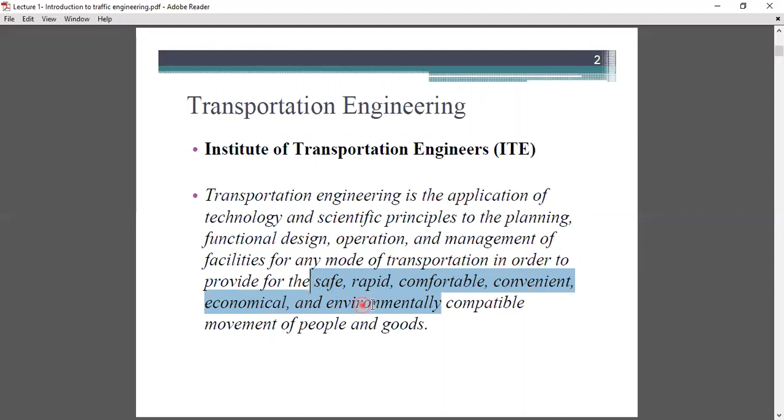This is in order to provide for safe, rapid, comfortable, convenient, economical, and environmentally compatible movement for people and goods. So transportation is nothing but the application of technology and scientific principle to the planning, functional design, operation, and management of the facility for any mode of transportation. We are not talking about just road transportation, land transportation, water transportation, or air transportation, but any mode of transportation. These applications of scientific principles are carried forward to provide safe, rapid, comfortable, convenient, economical, and environmentally compatible movement of people and goods.

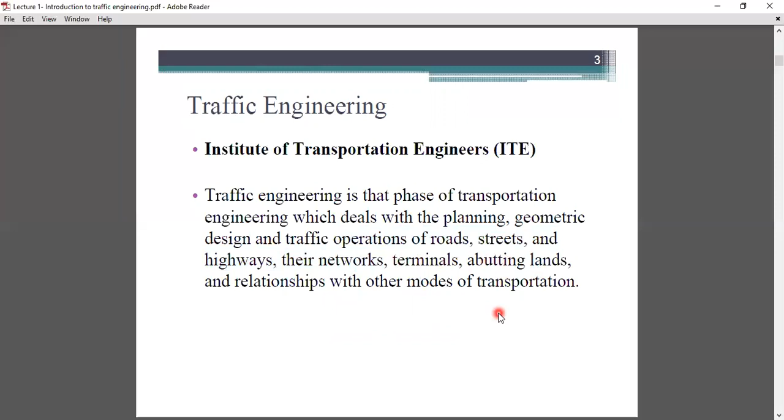So we are studying traffic engineering. What is traffic engineering? Traffic engineering is the phase of transportation engineering which deals with the planning, geometric design, and traffic operation of roads, streets, and highways, the network, terminals, abutting lands, and relationship with other modes of transportation. It is a kind of subdivision within transportation engineering which deals with the planning, geometric design, and traffic operation of roads, arterial roads, highways, national highways, state highways, major roads, district roads, any mode of roads, street and highway networks, terminals, abutting lands, and the relationship with other modes of transportation.

There are different types of transportation modes available: road network, rail, air, maritime, or pipeline. Pipeline is nothing but commuting or moving a fuel or liquid from one place to another place. It's a kind of transportation, but there are four main types of transportation: road, rail, air, and maritime, or in simple terms, waterways or water transportation.

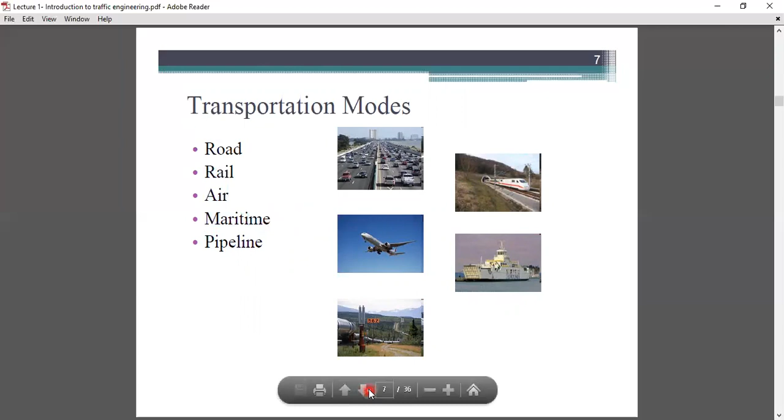Next is transportation modes. There are different types of transportation modes which we studied in the urban transport system, like automobile, taxi or for-hire vehicles, local bus transit, express bus transit, paratransit, light rail, heavy rail, ferry, intercity people transportation system, urban and intercity freight transport system. These are the different types of transportation studied in the previous subject of urban transportation system, and what modes are available for transportation. Let's take a fresh look: urban people transportation, intercity people transportation system, automobile, intercity bus, railroad, airways, waterways, and urban and intercity freight transportation.

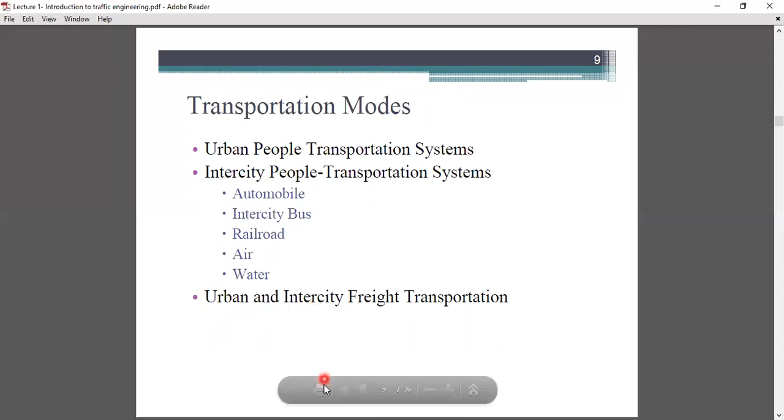So why are traffic engineers needed, or why is there a subdivision in transportation engineering named traffic engineering? There are three types of professional relationships: relationship with the general public, relationship with elected officials, and professional ethics. There are different types of relationships with general people, elected officials like government authorities, local urban bodies, and professional ethics. Ethics depends on the person, or may differ.

Safety. This is the primary objective of any traffic engineer. The principal goal of the traffic engineer remains the provision of a safe system for highway traffic, because there are statistics showing 26,000 fatalities in Iran, 40,000 to 43,000 fatalities in the US, something like a civil war, where fatal accidents occur on the road every day. So the primary objective of the traffic engineer is nothing but safety. The objective of safe travel is always number one and is never finished for the traffic engineer. It is not a kind of task that just provides safe travel for a small amount of period, but it is a never-finished work for the traffic engineer.

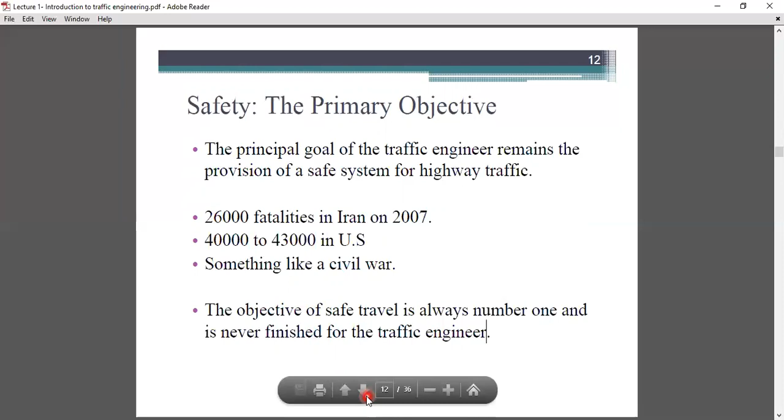Other objectives of the traffic engineer are to provide speed, comfort, convenience, economy, and environmental compatibility for the construction of roads as well as sustainable roads.

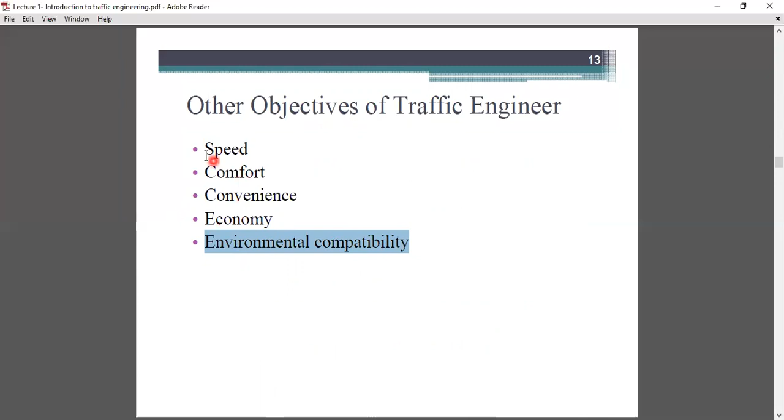There are different objectives like speed, comfort, convenience, economy, and environmental compatibility. While speed of travel is much to be desired, it is limited by transportation technology, human characteristics, and the need to provide safety. So there are different types of characteristics available, like human characteristics as well as vehicular characteristics. In human characteristics, we probably know the PIEV theory: perception, intellection, emotion, and volition time. These human and vehicular characteristics are to be included in traffic engineering.

Comfort and convenience are generic terms and mean different things to different people. Comfort involves the physical characteristics of the vehicle and roadways, and is influenced by our perception of safety. So comfort, convenience, and the desire for speed differ for different people. Some people want higher speed rather than comfort, but others choose comfort as a primary concern.

Convenience relates more to the ease with which trips are made and the ability of the transport system to accommodate all of our travel needs at the appropriate time.

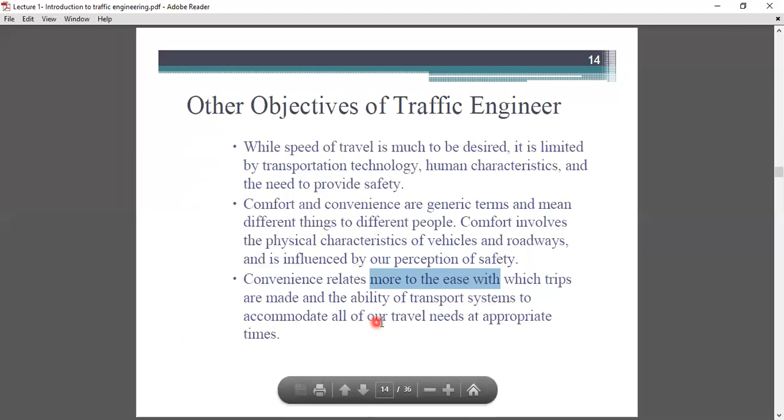Economy is also relative. There is little in modern transport systems that can be termed cheap. All road networks or transportation infrastructure involve huge capital investment. Due to modern practices, technology, and equipment, there is high capital investment going through. Highways and other transportation systems involve massive construction, maintenance, and operating expenditure, most of which is provided through general and user taxes and fees.

Nevertheless, every engineer, regardless of discipline, is called upon to provide the best possible system for the money. So the other concern is to provide economic feasibility.

So if you are hired as a traffic engineer at the NHAI, National Highway Authority of India, your primary concern is to provide a safe, convenient, comfortable, economically sound, and environmentally friendly plan or road network for the general people and for the country. It is the duty of every engineer to suggest this best possible system for the money. Harmony with the environment is a complex issue that has become more important over time.

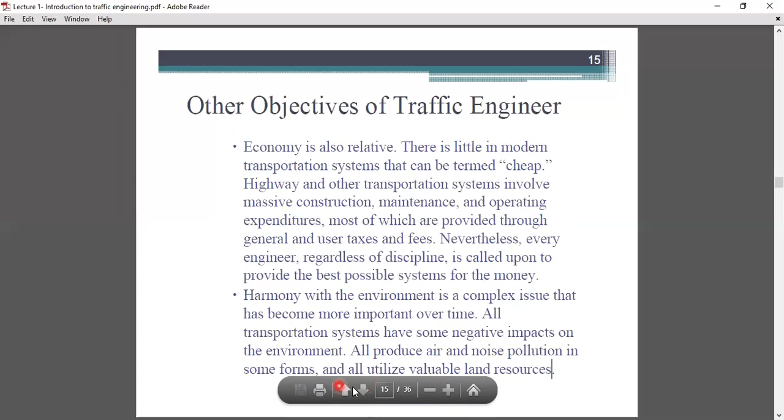Elements of the transport system include different types: facilities, vehicles, control system, users, and environment. Facilities means what kind of facilities are available. As an example, if we are talking about the BRTS bus system, bus stands are called facilities that users are going to use.

The next one is vehicle. If you're talking about BRTS buses, as we know right now all the BRTS buses are converted into AC buses, so there is higher comfort and convenience than in the past. So this type of characteristic falls into that particular category.

Thereafter, the control system. The proper scheduling, maintaining, and managing of a particular road network or BRTS network is hectic work, so it should be considered one of the major elements in the transportation system.

Thereafter, users - who use that particular system with ease, comfort, and convenience. And last but not least, the environment. As we all know, every system or everything humans build is going to affect the environment in both positive and negative manners. So harmony with the environment means providing solutions that minimize the impact on the environment. So it is a major element.

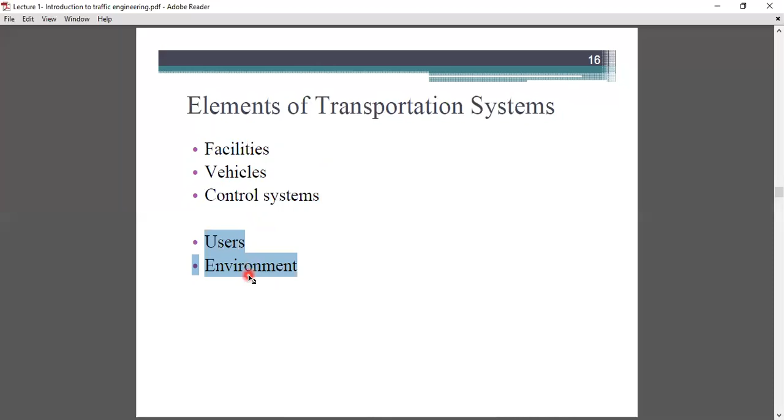Okay, so these are the different elements of traffic engineering. In the past we talked about elements of transportation engineering, but right now these are elements of traffic engineering. First is traffic studies and characteristics - how the current situation occurs, or how it will affect the near future, predicting how traffic will be available in the next 5 or 10 years, or what congestions occur at that particular time.

Next one is performance evaluation. Performance evaluation is nothing but providing how the particular system will work for users, or what kind of difficulties or problems are going to occur.

Next one is facility design. Facility design is nothing but developing a road that reduces the number of fatal accidents, as well as reduces queues at signals, or reduces traffic congestion at that road. So facility design has a more significant impact in traffic engineering.

Next one is traffic control. There are different types of traffic control parameters or methodology used, like sign boards, markings, signals, bumpers. So these kinds of traffic control devices or methodology are used in that particular domain to optimize or utilize the best out of it.

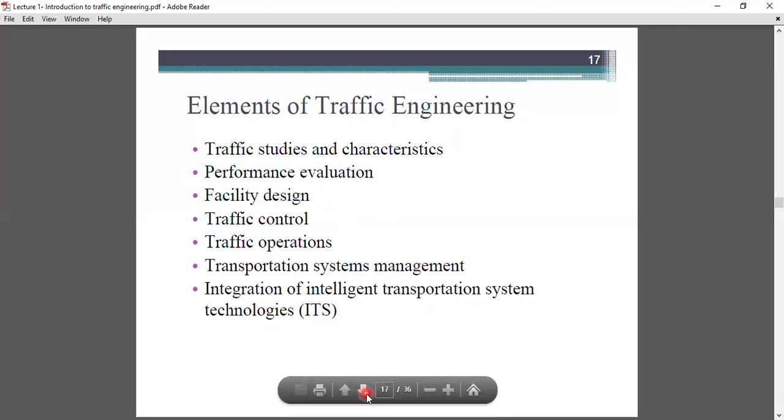Okay, so the first one, traffic studies and characteristics, involves measuring and quantifying various aspects of highway traffic. Studies focus on data collection and analysis used to characterize traffic, including traffic volumes and demand, speed and travel time, delay, accidents, origin and destination, mode use, and other variables.

So this kind of survey we do in traffic studies covers traffic volumes and traffic demand - how travel demand is going to affect that particular region. What are the trip generation ratio, trip distribution ratio, trip attraction ratio, and the modal split - which modes people are using for their day-to-day commute.

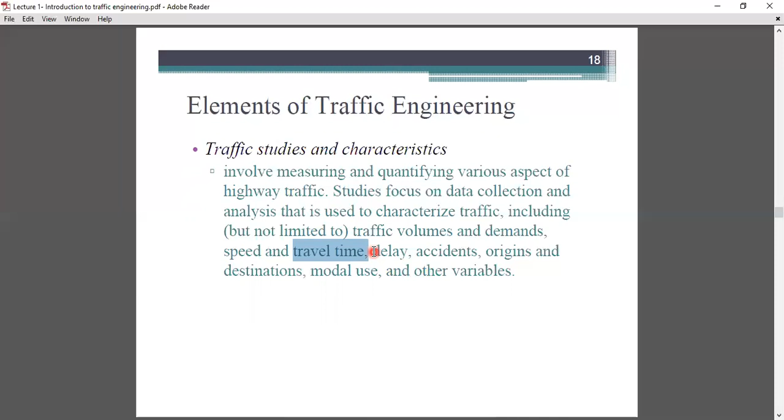So speed and travel time, delay, accidents, the number of fatal accidents, and various other data collection are needed, and analyzing that particular data helps identify how traffic is characterized in the current situation as well as in the next 5 or 10 years.

Next is performance evaluation, which means the way traffic engineers rate the operating characteristics of individual sections of facilities, and the facility as a whole, in relative terms. Such evaluation relies on measures of performance quality, and is often stated in terms of level of service. Level of service is a different portion.

The Ministry of Urban Development publishes the LOS booklet every 2 years, and LOS classifies the level of service - it's a rating system for that particular service used by the general people.

So performance evaluation is a kind of system where people rate that particular system, how it affects their day-to-day life, what comfort and convenience it provides, and how safe the system is.

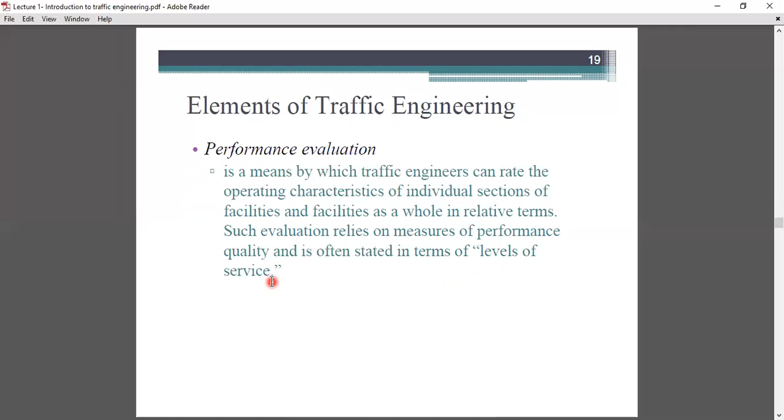Next is facility design. Facility design involves the traffic engineers in the functional and geometric design of the highway and other traffic facilities. Traffic engineers per se are not involved in the structural design of the highway facilities, but should have some appreciation for the structural characteristics of the facility.

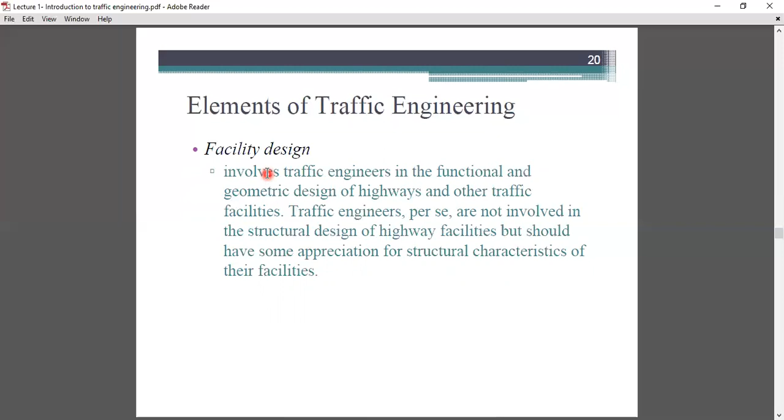So in traffic engineering, we are not necessarily concerned with the structural characteristics of the highway, like whether it is a rigid pavement or flexible pavement, or the thickness of the base layer and sub-base layer. But it involves just an appreciation, or suggesting a suitable solution to the structural designer who designs a pavement for that highway, national highway or state highway. So in facility design, traffic engineers only focus on how it will affect the day-to-day users.

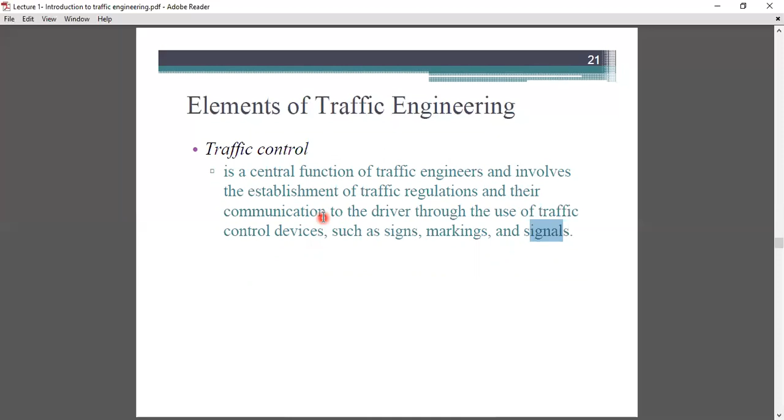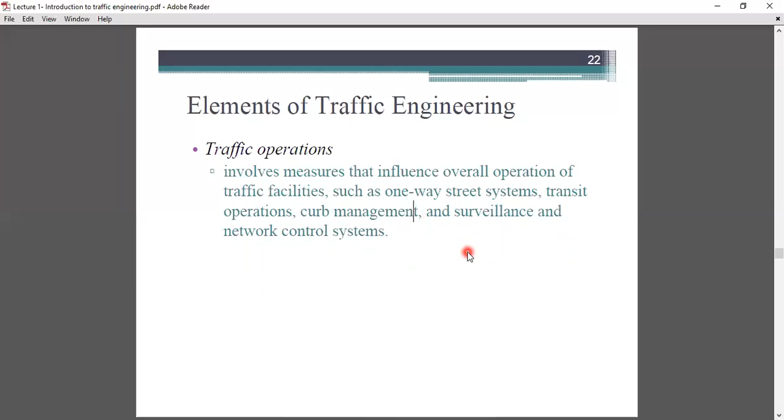Next is traffic operation. It involves measures that influence overall operation of traffic facilities, such as one-way street systems, transit operation, curb management, and surveillance and network control systems. In traffic operation, different types of operation methodologies are used, particularly for preventing excessive vehicles going through a particular street, such as one-way street systems, transit operation, curb management, and surveillance and network control systems.

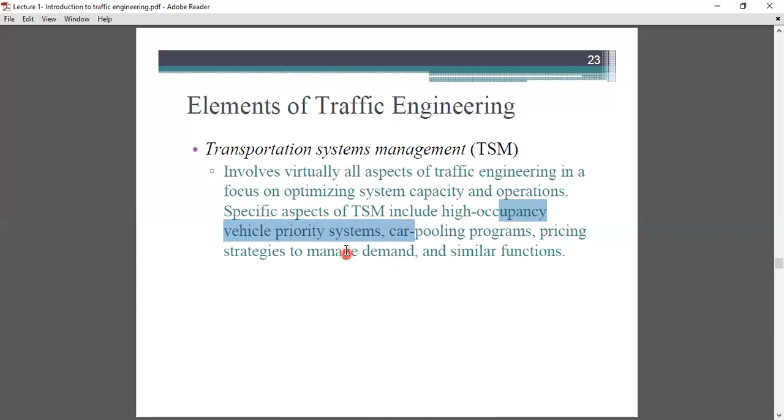The next one is transportation system management, which involves virtually all aspects of traffic engineering, focusing on optimizing system capacity and operation. Specific aspects of TSM include high occupancy vehicle priority systems, carpooling programs, pricing strategies to manage demand, and similar functions, working on managing travel demand as well as traffic demand.

The next one is intelligent transport system, which refers to the application of modern telecommunication technology to the operation and control of the transportation system. Such systems include automated highways, automated toll collection systems, vehicle tracking systems, in-vehicle GPS and mapping systems, automated enforcement of traffic lights and speed laws, smart control devices, and others.

But intelligent transport systems are a kind of very costly infrastructure, so they are not used frequently. But due to technological advancement in the field of transportation and traffic engineering, there are still upgradations and improvements going on in that area. In the very near future, in the next 5 or 10 years, we will see these kinds of systems being used very frequently for day-to-day commute.

So there are different elements of traffic engineering. First is transportation demand. We already had a discussion on this in the urban transportation system, about what transportation demand is and the difference between mobility and accessibility. So let's just take a quick look at that again.

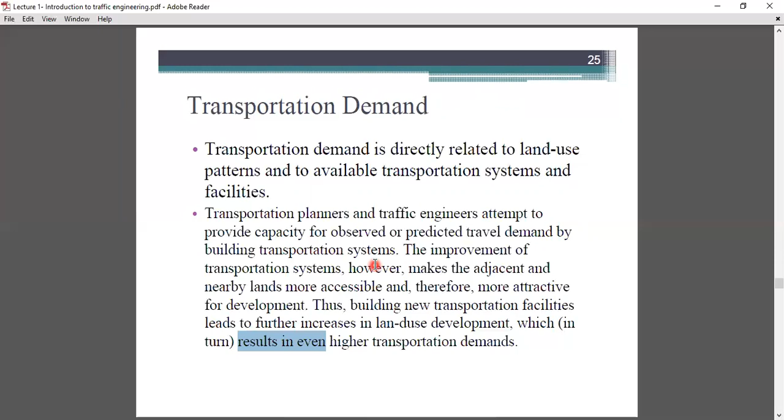So to obtain that travel demand, the first step is to create an O and D survey, origin and destination survey. So this is transportation demand. It's connected with the transportation facility, it's connected with land use, and it's also connected to the transportation demand.

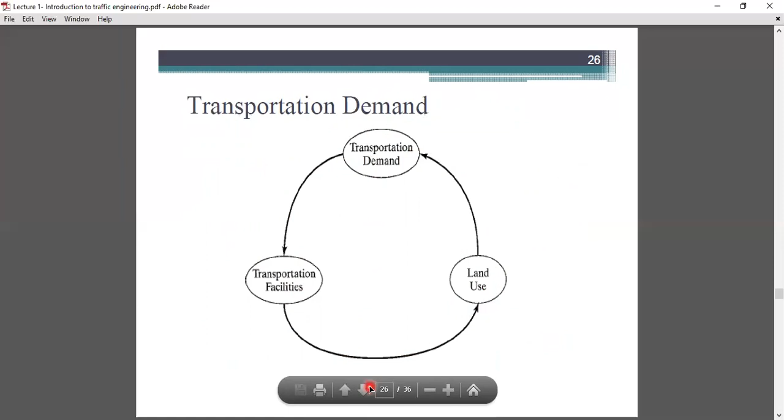So the next one is mobility and accessibility. So what is mobility and what is accessibility? In simple terminology, accessibility is nothing but access to the activity.

And what is mobility? Mobility is nothing but access to movement. So accessibility is access to the activities. Like if we are talking about any bus transportation system, how frequently can you reach that bus stop - that's called accessibility. If a bus stop is near your home, say a 5 minute distance, there is high accessibility available in your area. So accessibility is access to the activities, and mobility is access to that movement.

So when you reach that particular bus stop, how fast you get a new bus for ridership - that's called mobility. So it is very much connected with each other, mobility as well as accessibility.

Mobility gives travelers a wider range of choice of where to go to satisfy particular needs. Mobility allows a shopper to choose from among many competing shopping centers and stores. Accessibility is a major factor in the value of land. When land can be accessed by many travelers from many potential origins, it is more desirable for development and therefore more valuable. Thus, proximity of land to major highways and public transportation facilities is a major factor determining its value. So accessibility is access to the activities, and mobility is access to the movement.

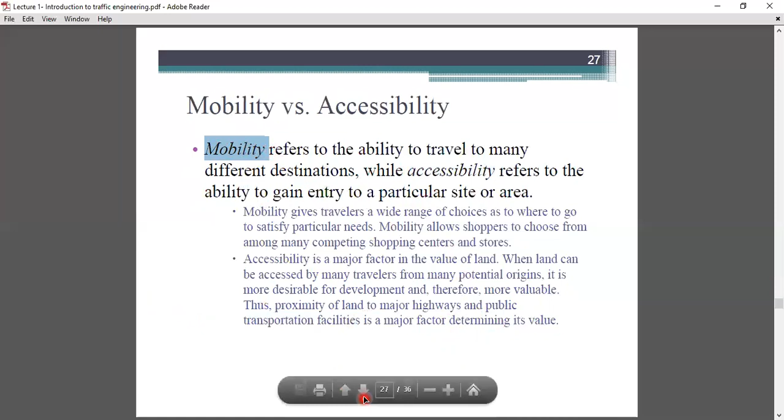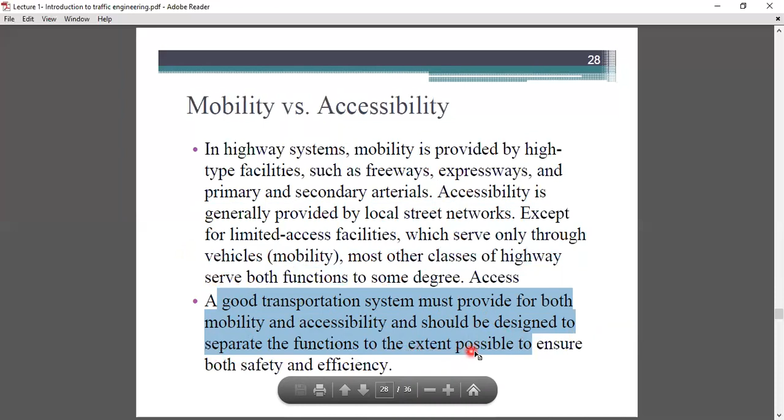In a highway system, mobility is provided by high type facilities such as freeways, expressways, and primary or secondary arterials. Accessibility is generally provided by the local street network, except for limited access facilities which serve only through vehicles. Most other classes of highway serve both functions to some degree. A good transportation system must provide for both mobility and accessibility, and should be designed to separate these functions to the extent possible to ensure both safety and efficiency.

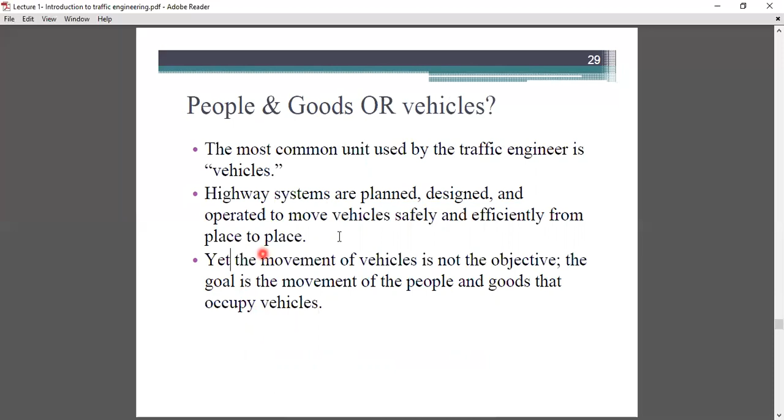People and goods, or vehicles - the most common unit used by the traffic engineer is the vehicle. Highway systems are planned, designed, and operated to move vehicles safely and efficiently from place to place. Yet the movement of vehicles is not the objective itself - the goal is the movement of the people and goods that occupy the vehicle. So the main goal is the movement of people from one location to another, or the movement of goods from a home industry to a parent industry, or from a parent industry to another industry. These are the main goals of traffic engineers.

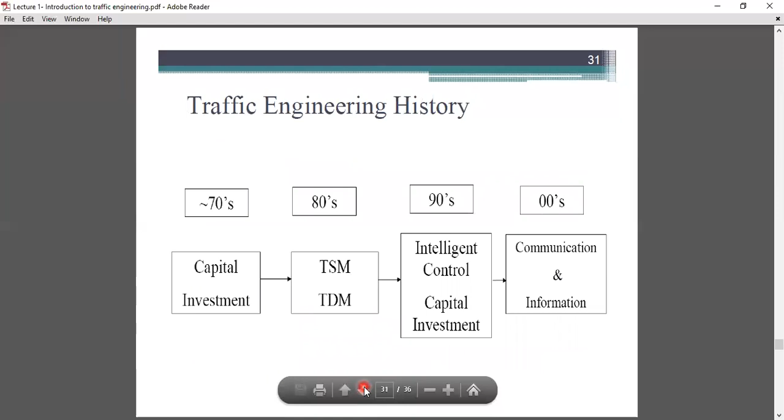So in TSM, transportation system management, there are two types of fundamental approaches available: facility design and traffic control. Facility design includes adding lanes, removing bottlenecks, bridges and tunnels, revising geometry to increase speed, or providing super elevation to smoothen curve formation, or vehicle improvement to reduce headways. Traffic control includes ramp metering, signal coordination, signal phase sequences, left turn treatments, and parking restrictions - these types of suggestions or solutions are adopted worldwide. We discuss TSM in the sixth semester urban transportation system course.

If you have any queries, please go through that particular theory so that you can easily understand what TSM is. So this is the very first lecture of traffic engineering, the basic introduction of what traffic engineering is and what a traffic engineer does in the real world.